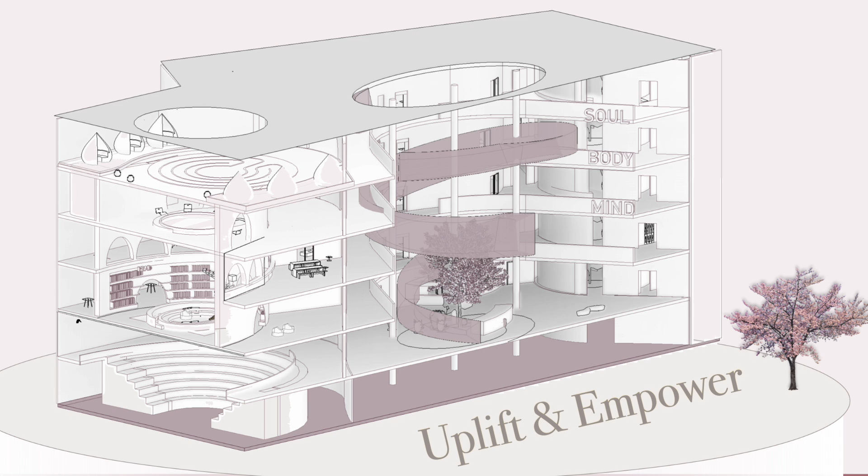The design of the Healing Hub will meet the needs of the primary users by providing a space that promotes a positive healing environment and helps women cope with anxiety and stress. The space will be designed to uplift and empower feelings of joy and happiness.

The Healing Hub will be located in Fordham Heights in the West Bronx in order to reach their key demographic. Fordham population is mostly Hispanic, Latino races, followed by African American, and lastly, Asian population. Many women are immigrants, undocumented, and have a strong mistrust of authority.

They do not trust doctors and fear getting tested in hospitals. Many women in the Bronx live below the poverty line and have little to no education. This has been linked to breast cancer disparities in all areas of care.

There are many complex factors that contribute to breast cancer disparities. The most apparent factors are linked to education, lack of healthcare coverage, and even transportation. Factors affected by social and racial inequalities come to play as well.

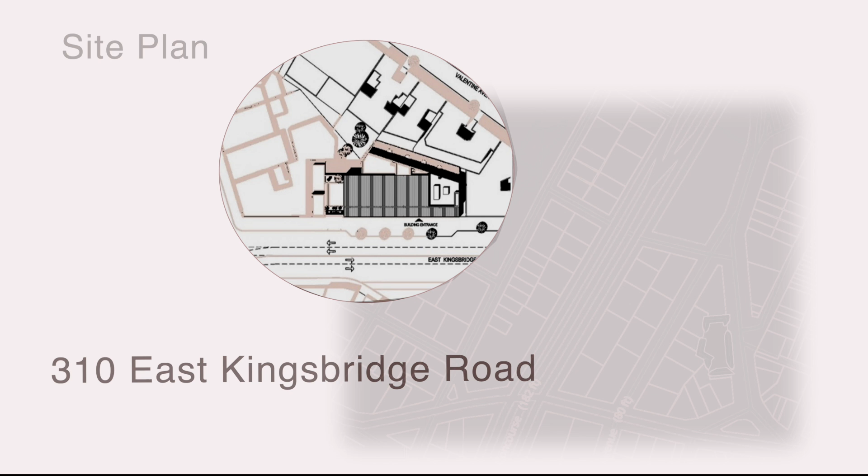The site is located at 310 East Kingsbridge Road. It is centrally located to many different forms of transportation, making it easily accessible. The building is 78,000 square feet and has 5 floors, including a concourse level.

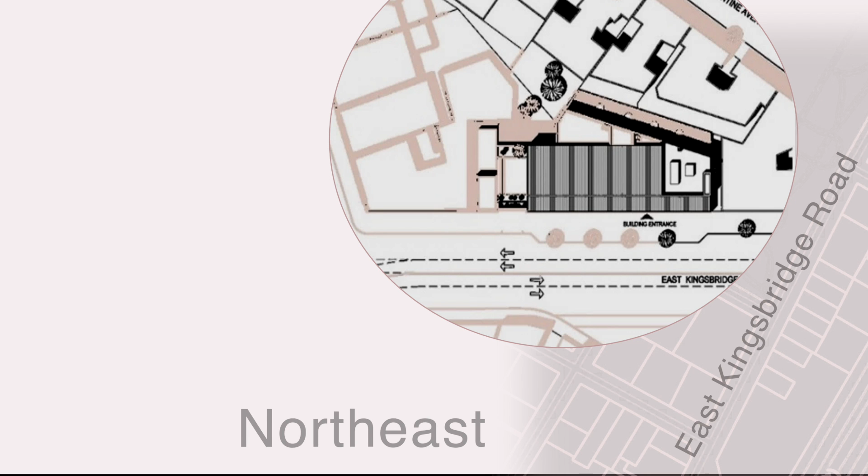The building faces northeast and spans from East Kingsbridge Road between Fordham Road and East 192nd Street. The building has direct access to the sidewalk and multiple entrances. Elevators and a main stair are situated at the back and west side of the building, and offices and support spaces are positioned along the west and north side.

The design concept is inspired by the individuality of each woman. Breast cancer is the most common occurring cancer in women around the world. There are several types of breast cancer, and identifying which form a woman has is essential in tailoring the best treatment for her.

No two breast cancer diagnoses are the same. Each woman has her own story, her own unique cancer, her own set of DNA. The center will celebrate each woman's personal identity and struggle with breast cancer and the ripple effect it has on the woman's life, while promoting female empowerment and individuality.

The stacking diagram will show the floors and how they are organized by function. Each floor has specific activities to limit the amount of traveling the woman must make. The hub will offer a clear and easy wayfinding system.

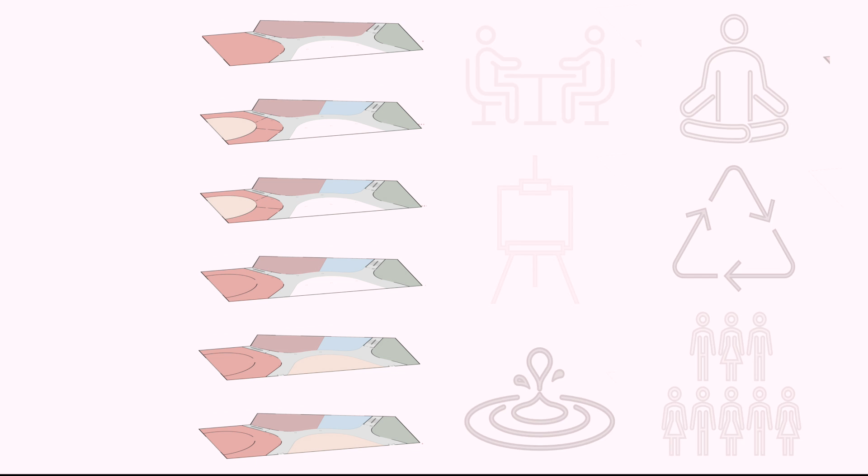The wayfinding design will blend in with the overall design of the space. The design strategy will be to distribute areas of use close together. This strategy will help reduce the distance between places that require users to travel.

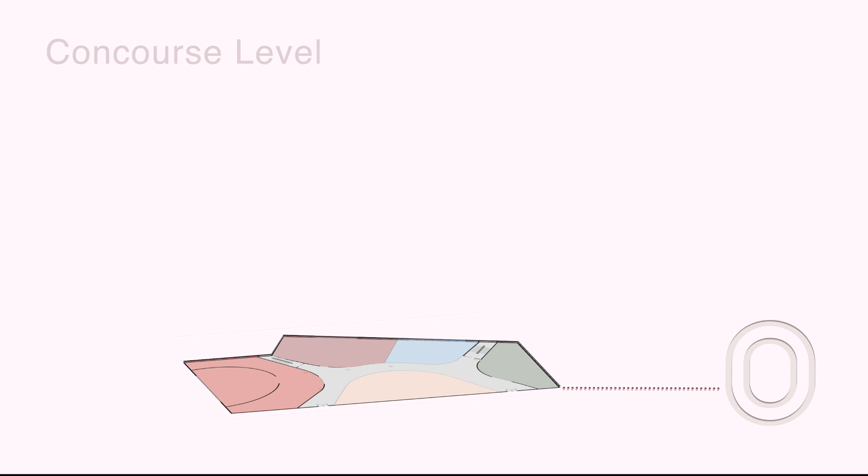Appropriate distances between these places will aid in high levels of comfort, satisfaction, and help to lower levels of stress. The concourse level will have double height auditorium, daycare, conference rooms, and galleries. The first floor is the welcome hub. The activity areas include the open atrium with memorial garden, boutique and salon, as well as auditorium.

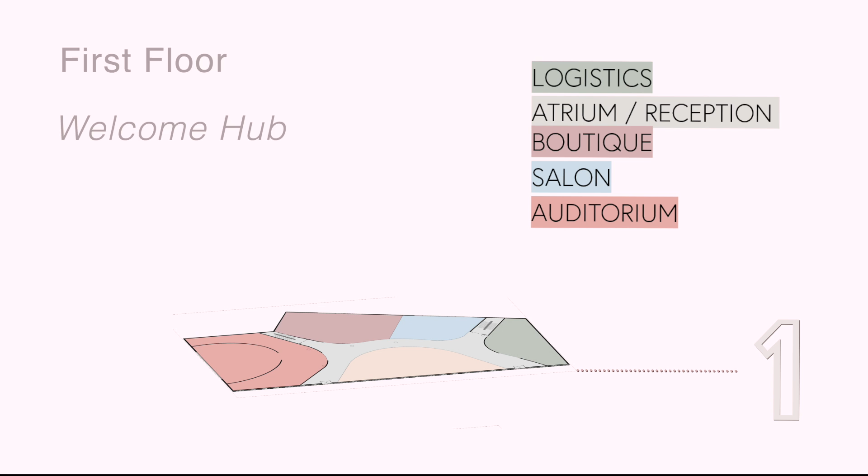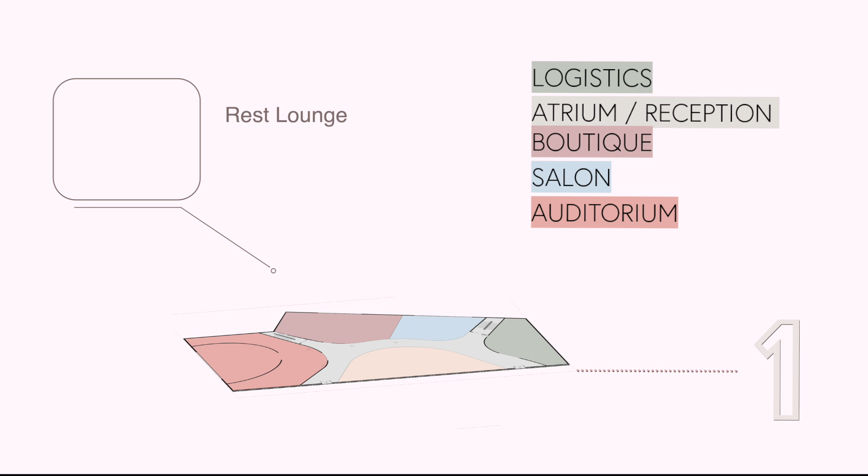On each floor, located next to the elevator, there will be a rest lounge. This is an area for women to sit and gather themselves before or after activities. It also encourages socialization and interaction, which is a big part of the support system that helps cancer patients.

The second floor will be the work hub. This is where all the employees and volunteers will work and meet with members. The third floor will be the learning hub. This will include all the multi-purpose education classrooms, including art therapy, music therapy, and nutrition classrooms, as well as research computer labs and access to the library.

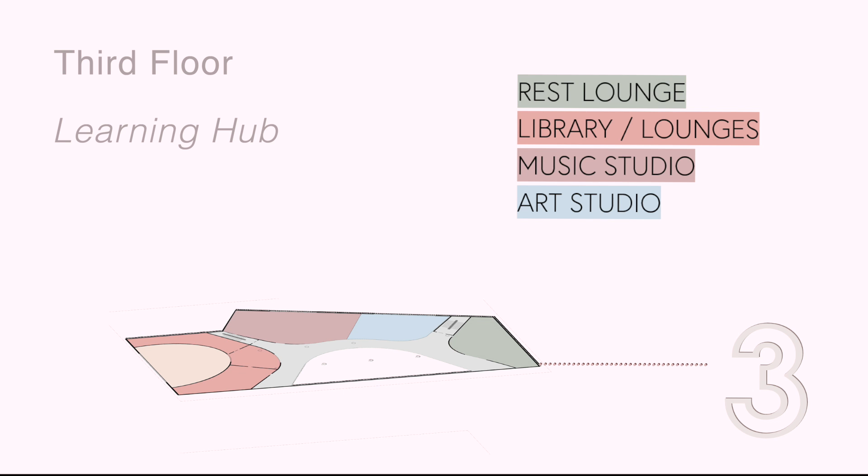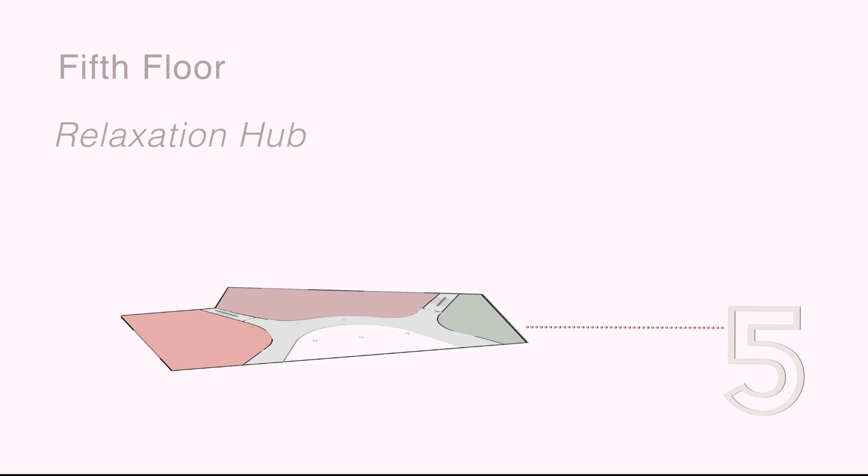The fourth floor will be the wellness hub, which will have activities pertaining to wellness: the spa, meditation spaces, private Reiki, and physical therapy area. The fifth floor is the relaxation hub. This is where all the healing will take place, in the healing garden, the health cafe, and the nutrition center.

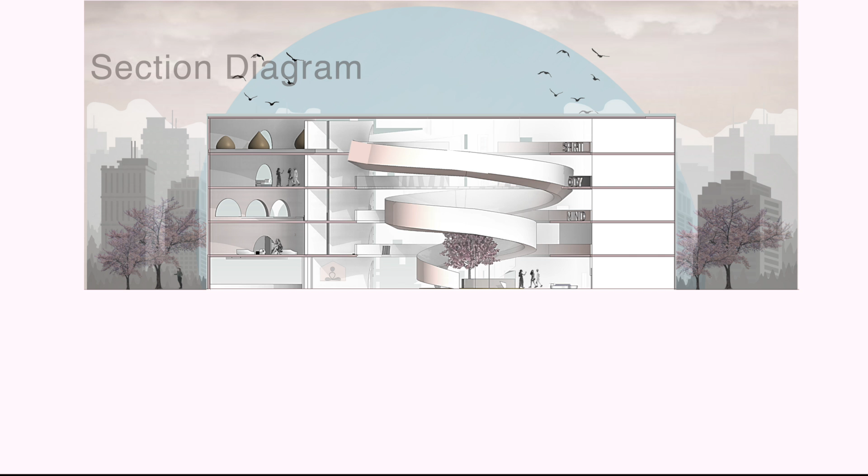The building's facade will be semi-transparent, giving members privacy once inside. The building's exterior will be cladded in wood panels and will provide lots of natural lighting through the large arch windows throughout the building. The section diagram illustrates the visual connection desired between the different functions in the building in order to create a clear overview of the building and the different activities.

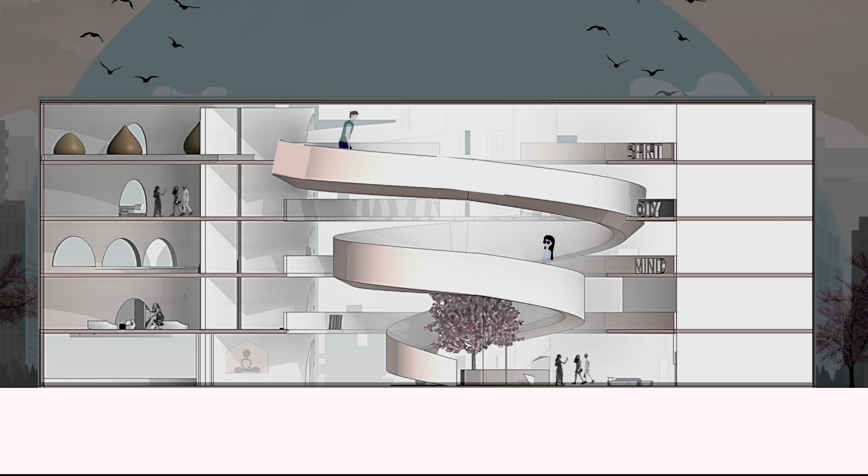It is important that the functions are visible from each other, inspiring the users to participate in social gatherings and create a clear overview of the building's layout. Furthermore, it is important for users to have a clear overview of the different private and social zones in each plan, as their moods might change several times during the day, creating a need for easy access between the different zones.

The concourse level will have multi-purpose classrooms, a daycare center for members to drop off their kids while partaking in classes. In the center, there will be an art gallery space used for displaying members' art, as well as hosting local art shows for the community and engaging the locals.

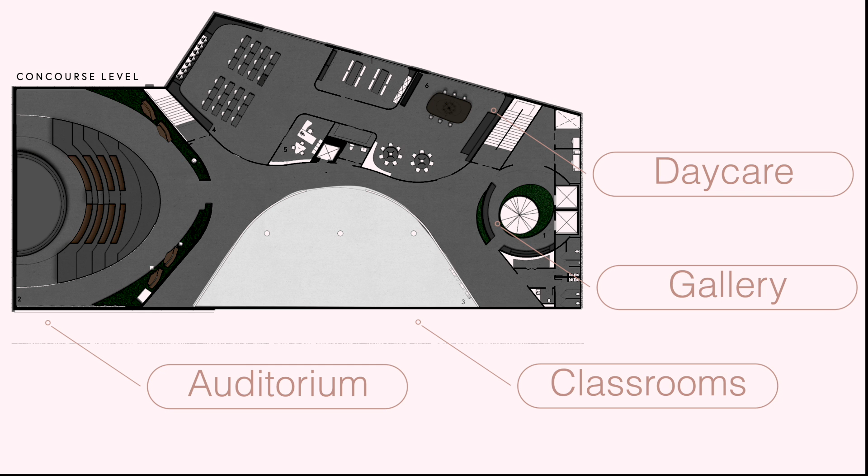The ground floor's main entrance will open up into the atrium. As you enter the building, the first thing visitors will see is the ribbon ramp that will be located in the center. The ramp ensures good internal flow between the floors.

A reception area will provide information regarding services and help members locate activities. There will be seating for members to wait for appointments or meet up with other members. Restrooms and elevators will be located to the right, as well as the center of the floor plan, making it easy for members to get around and not have to travel across the building.

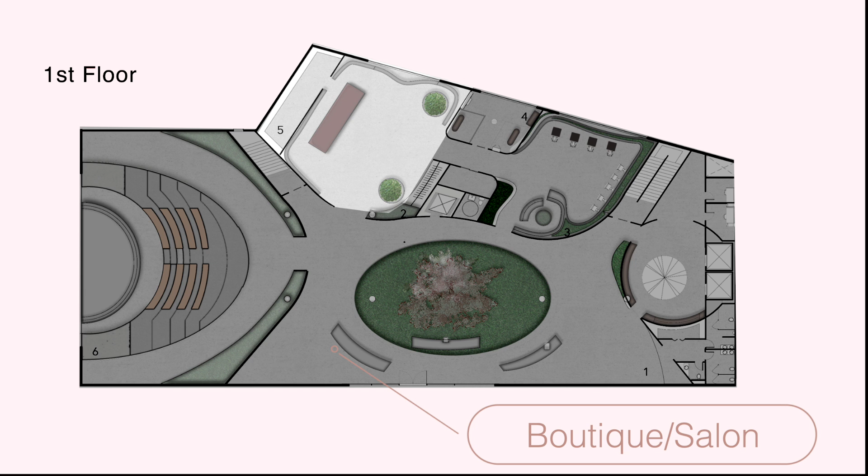The boutique and salon will be located towards the back. Between the spaces will be a dressing room where members can change privately. To the left will be the auditorium. The space will be used to host events and lectures. Wooden panels will span across the space. Concrete circular stairs will provide easy and clear circulation.

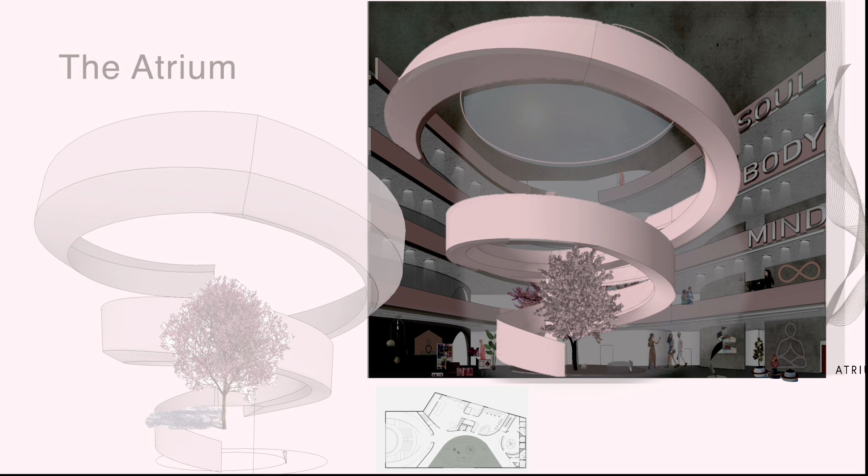The atrium will be the members' first impression of the space. The ribbon ramp is inspired by the design concept of an abstract version of the DNA strand. The ramp will be made out of polished concrete and connect to all floors. The skylight will be located over the spiral, providing a sense of movement and flooding the space with natural lighting.

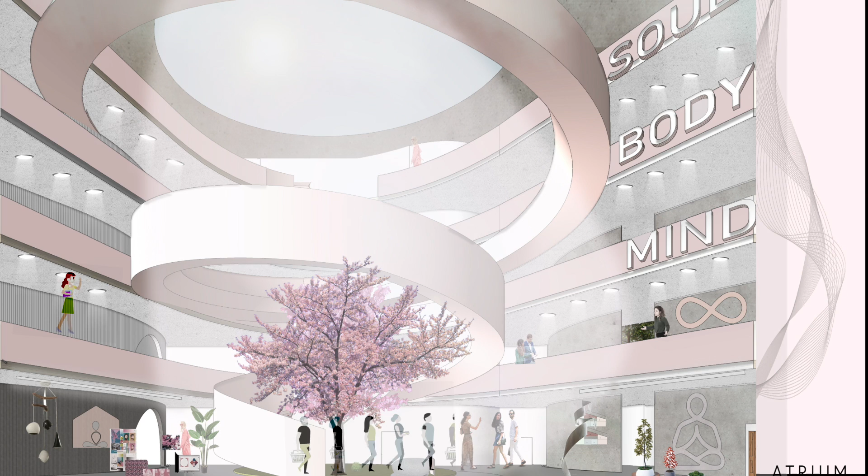The floor plan will be cut to create space in the open common area. The opening of the floors allows vertical views, giving an overview of the activities and the people upstairs or below. There will be a memorial garden with a large tree with names of breast cancer survivors. The recessed linear lighting will illuminate the open atrium and blend in with the seamless design. Cast-in-place concrete floors will be used in all of the public spaces.

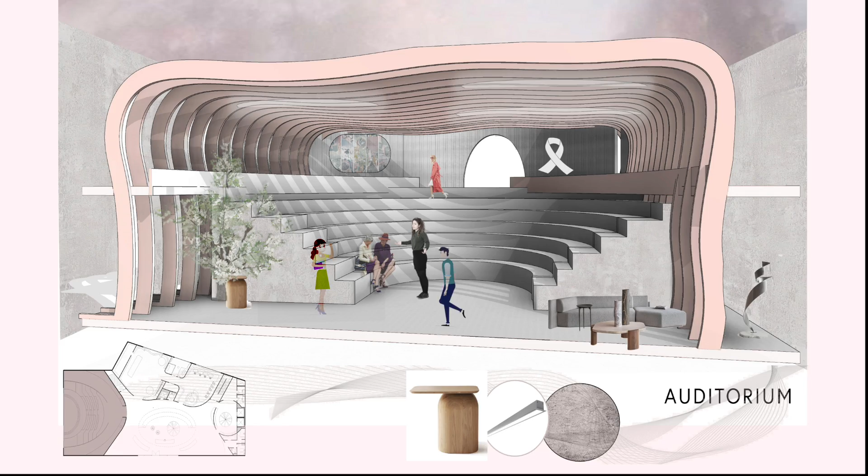The auditorium will be a double-height space. The space will have areas to hang out before and after events. Modular furniture will be used for additional seating for large crowds. Concrete circular stairs will connect the two floors. The space will use acoustical materials in most areas, especially in large open areas.

Unpleasant noise has a negative effect on people and may bring psychological reactions such as irritation, fatigue, and low pain threshold. The hub will implement sound and noise reduction as a design parameter.

The acoustic repeating organic panels will span across the space, providing minimum amounts of echo, and the use of moss walls and plants will further control the noise levels.

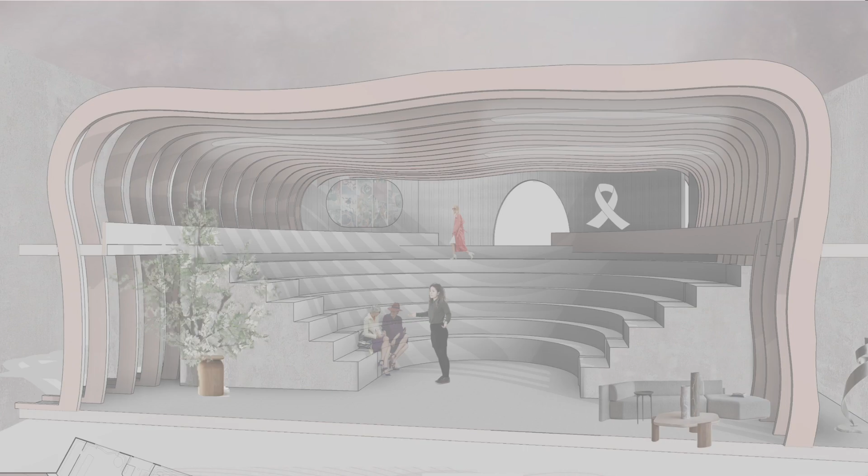The boutique will have many different beauty products and apparel. All of the proceeds will go to charity.

The organic pink ceiling panels mimic the waves of the ocean, providing an instant soothing effect. The uniform pale pink color will provide a balance against all of the vibrant products. The recessed linear lights will be placed between the ceiling panels.

Since color is a very powerful device in the built environment, the hub will incorporate many different color schemes depending on the function of the space. However, to keep the design cohesive, the color will be in tones, tints, and shades of warm and cool colors.

The warm color hues are associated with extroverted responses to social contact. A quiet relaxing, contemplative atmosphere is created by cool hues. The hub will use intense colors only for accents and for contrast to improve visual organization, such as brightly colored grab bars, door frames, and levers.

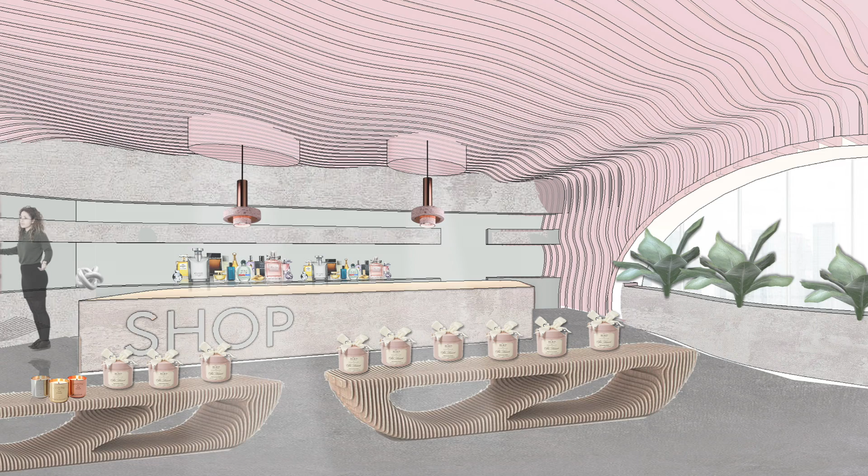The second floor will have an open co-working space with workstations used by staff members and volunteers. Many of the staff members are part-time, so there will be an open co-working space with multiple workstations.

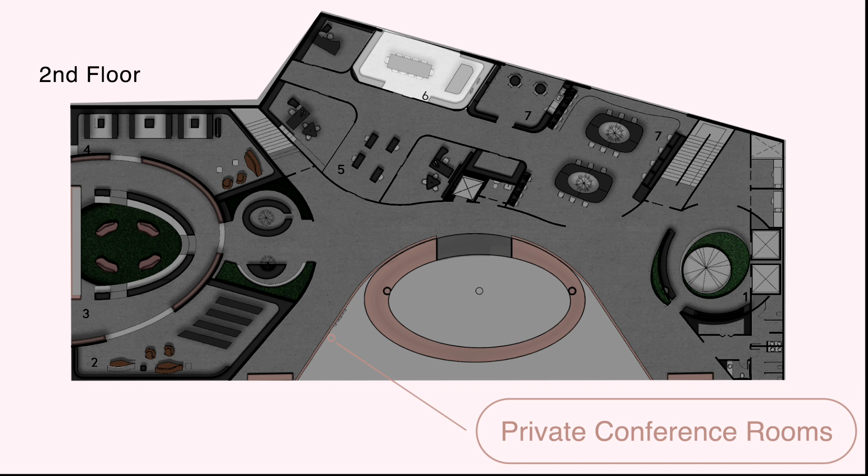All furniture will be ergonomic. Modular furniture will allow for different functions needed in the space. Private conference rooms and executive offices will have acoustical ceiling panels, carpet flooring, and soundproof glass. This will ensure complete privacy.

The library will have areas for members to socialize in groups or individually. Seating will be in the center with wrapped around bookcases that will cut into the floor. Lounge spaces will have movable screens for privacy and secluded areas for counseling.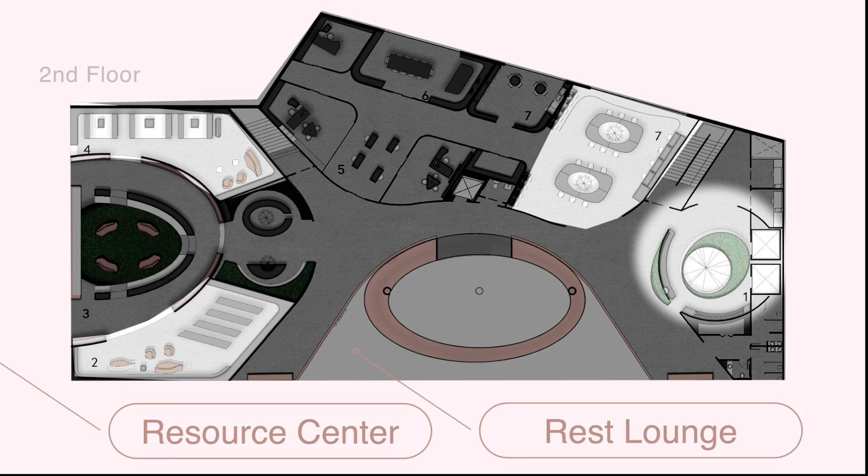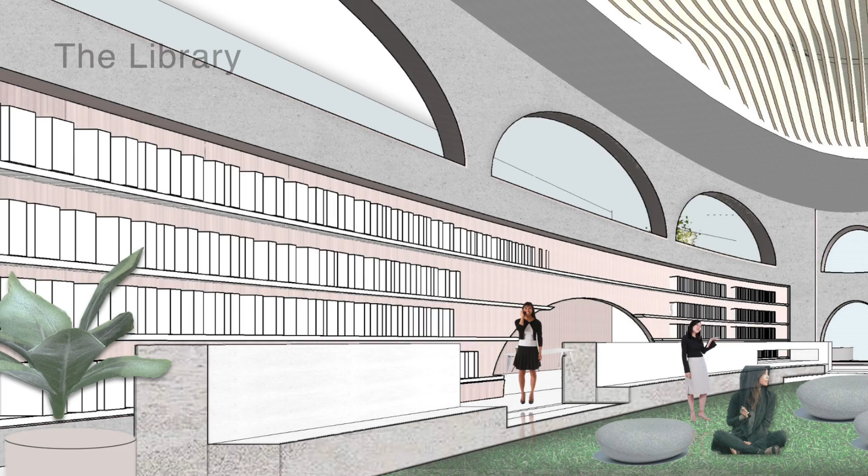The library and lounge space is where members will spend most of their time, as they function as a natural gathering point before or after physical activities, lessons, counseling, and therapy. Furthermore, the activities implemented in this area encourage interaction and conversation and will provide the possibility for informal conversations in smaller groups or for individual reflection and rest.

The use of casual arrangements with movable furniture, rugs, and plush lounge seating will create an overall homey atmosphere and will foster social interaction in a positive manner.

The library and support space area are left open to encourage a visual and audio connection. There's a staircase allowing for easy yet active transition between the two floors. The open nature of the space is designed to encourage use of multiple programs while visiting the hub.

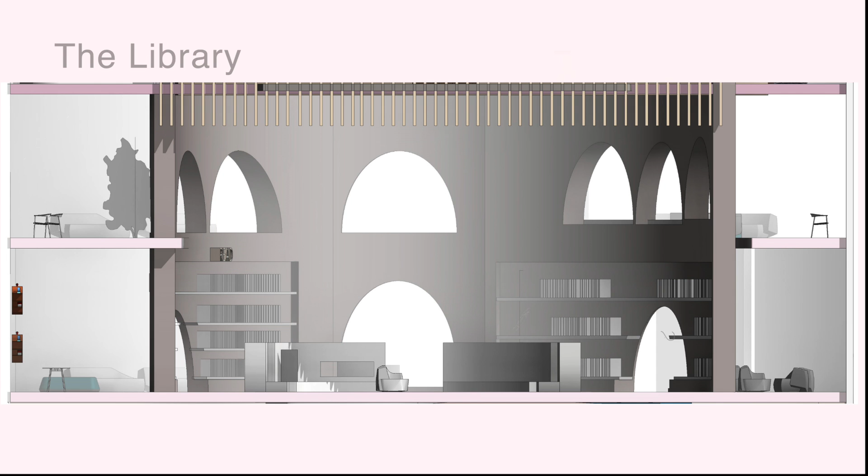The third floor will have multi-purpose classrooms and therapy spaces. The music studio and art studio spaces will have movable walls as well as flexible furniture that can be repositioned for maximum flexibility. The music studio will have acoustical ceiling panels and sound-absorbing floors.

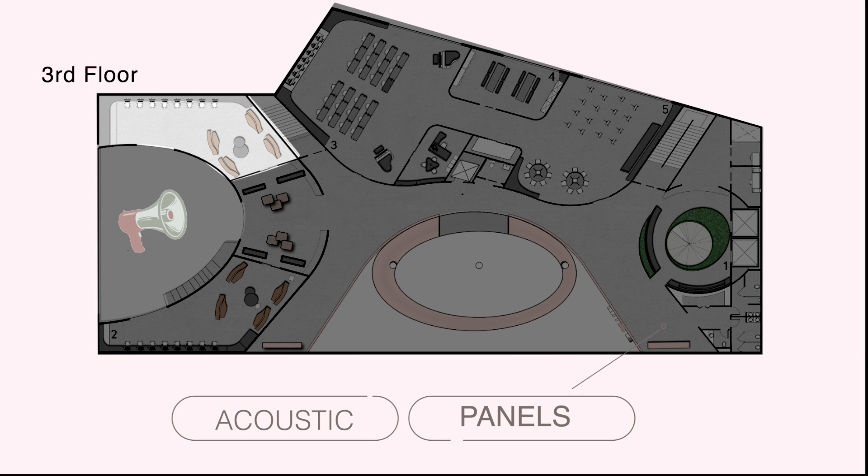All spaces will have controllable lighting and temperature to accommodate different needs and ensure comfort. Support groups and computer labs will overlook the library. There will be a staircase that connects the two floors.

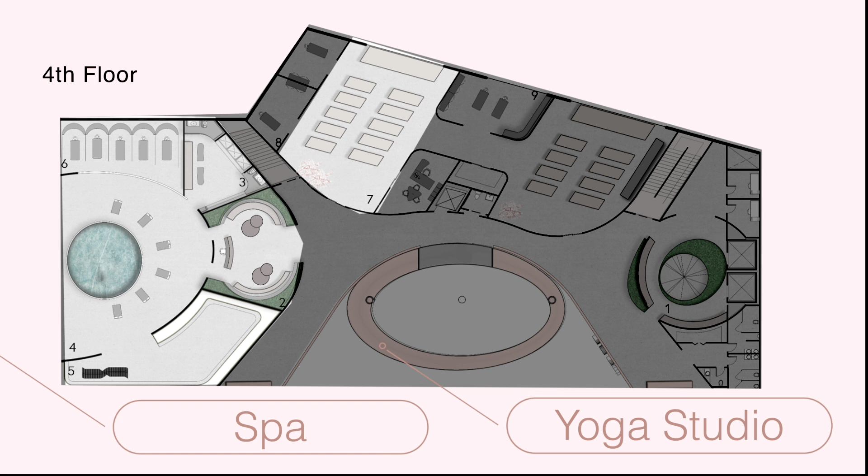The fourth floor will have a spa as well as a meditation and yoga studio. The spa will have its own secluded area. This space will include reception area, locker rooms, treatment rooms, and sauna.

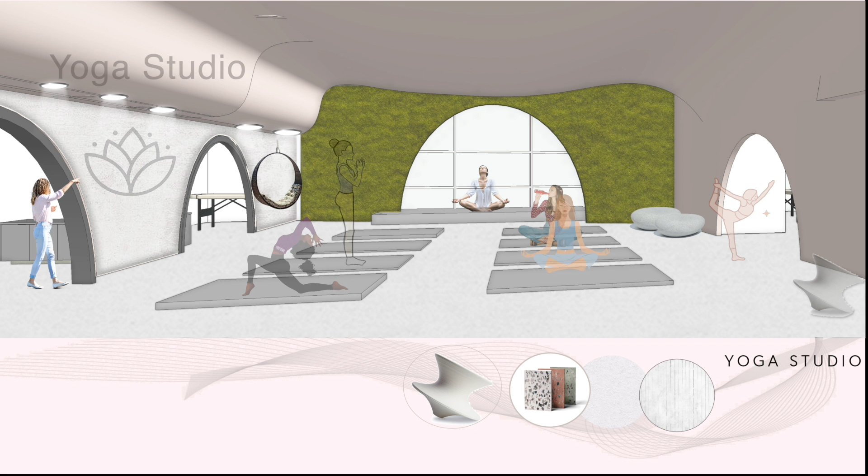The meditation and yoga studios will accommodate many different size classes. There will also be areas for members to work out with trainers on their own. The space will be designed to create a welcoming and calming environment in order to avoid sensory overload. The yoga studios are designed to be adaptable spaces and to serve as a platform for multiple classes and therapies.

Individual therapy spaces will allow members to meet one-on-one with trainers. Private rooms will have acoustic ceiling panels, soundproof partitions, and soft flooring to provide the most comfort.

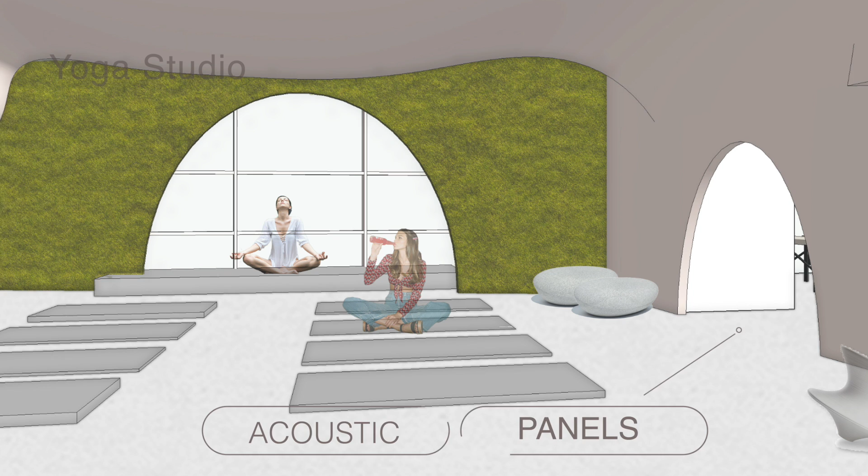The aesthetic of the space is based upon neutral colors and natural materials, allowing for the space to be welcoming for all ages. Large arch windows throughout the building allow for an ample amount of natural sunlight to enter the space. In order to help with heat control and absorb sound, felt window shades and movable wall partitions are available along the windows.

A host of sustainable design strategies will enhance the hub's operations and contribute to the health and comfort of its users. Some design strategies include solar water heaters, a cooling water tower, retention tanks, insulated building envelope panels, low emissive windows, and heat recovery system.

These allow for comfortable air and water temperatures while minimizing the consumption of non-renewable resources. Automated light controls, low flow plumbing fixtures, and high efficiency mechanical equipment further reduce the environmental impact of the hub.

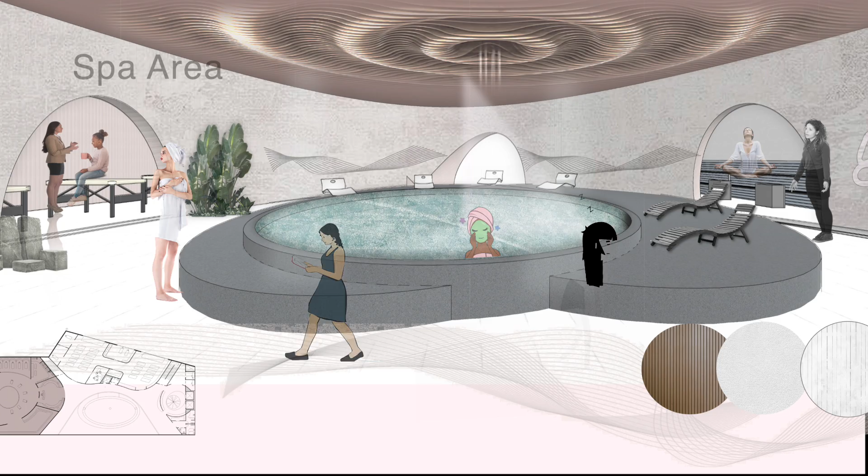The spa area will provide substantial restoration from stress and reduce anxiety. Members are greeted at a softly lit reception area. Glowing glass panels conceal the rooms, blurring the figures of staff and members behind.

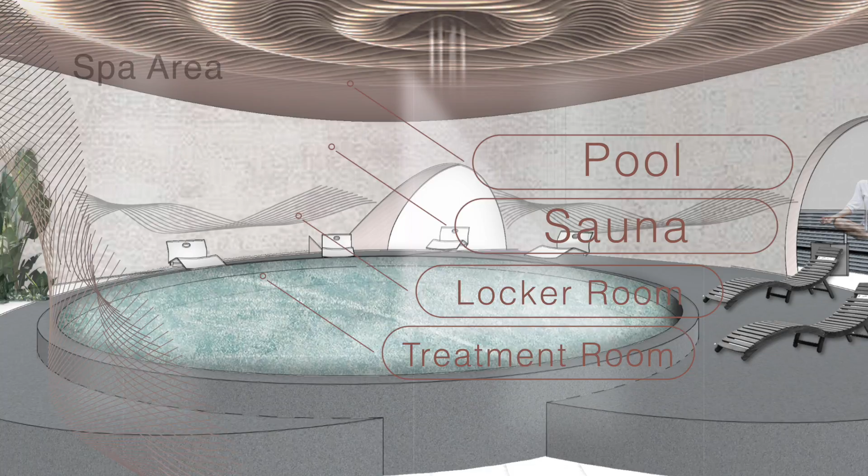The plan is arranged around a central space, creating a continuous flow. Spaces will include a featured saline pool, a large sauna offering salt therapy, multi-sensory showers, a locker room, and treatment rooms. Biophilic design will play an important role, incorporating natural elements from local scenery, geography features, and panoramic vistas to help members feel more comfortable, function better, and promote well-being.

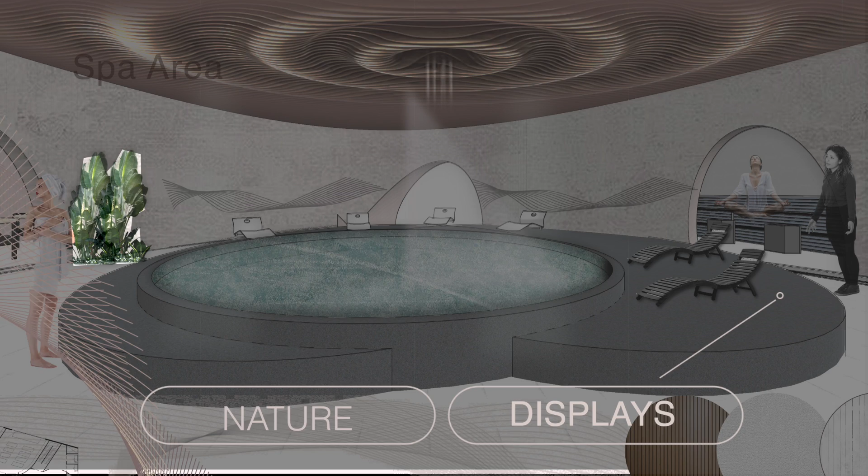Throughout the space, there will be plants and indoor vertical gardens, as well as visuals of nature displayed graphically throughout. The overall design will provide an atmosphere of peace and tranquility, since members are coming to the building as a place to heal and for some much-needed relaxation.

The floors are covered with muted carpeting that matches the tone of the woodwork, while the areas surrounding are filled with gravel, stepping stones, and pot plants. Windows are covered with translucent screens to soften daylight streaming through. Minimalistic lanterns emit warm glows throughout the rooms.

Colors were chosen to evoke a calm and relaxing environment. Members can feel a sense of stability among their lives.

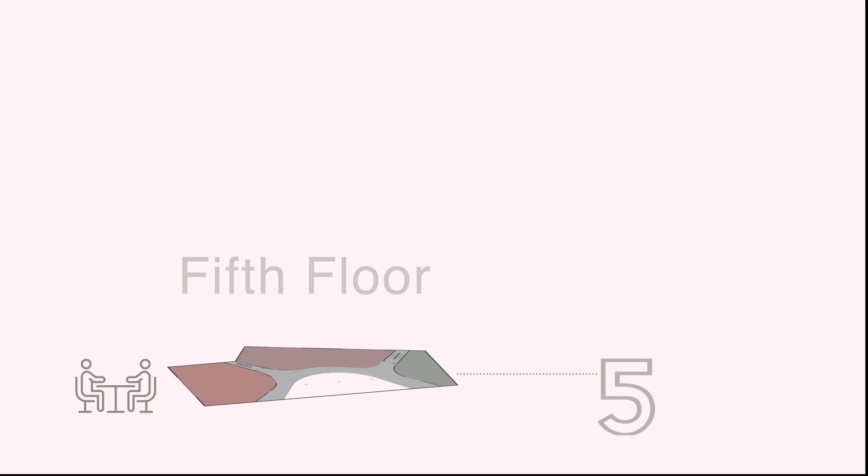The 5th floor will have a healing garden, health cafe, and nutrition lab. This is where a bulk of mingling and self-reflection will take place. The health cafe will be used by members as well as staff to enjoy a healthy meal. All things served will be approved by the nutritionist.

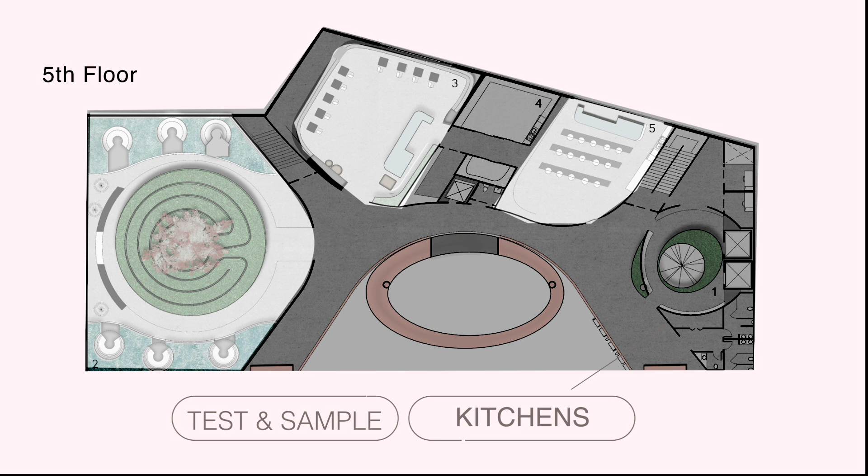Booth seating will line the walls, covered with soft fabric for maximum comfort. The health lab will be next to it and used for nutrition counseling and cooking classes. There will be a test kitchen for members to learn how to cook healthy meals, and a sample kitchen for food prep. The kitchen will be located between the cafe and health lab to make it easily accessible from both areas.

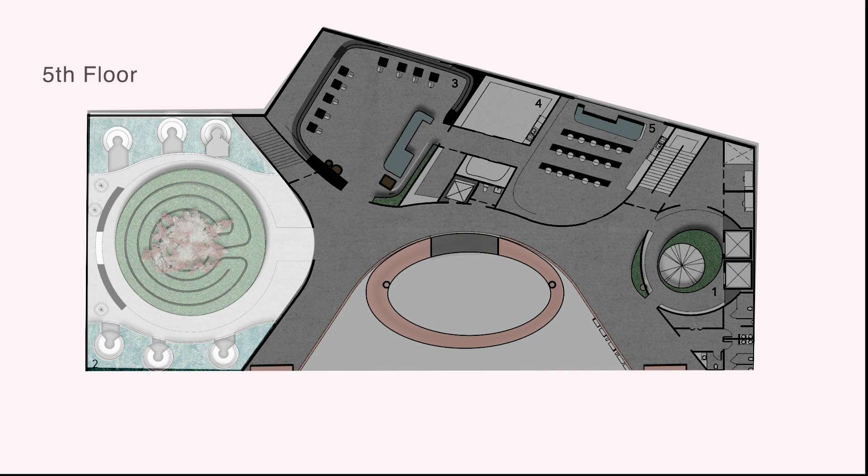The healing garden will take up most of the 5th floor, featuring a labyrinth maze in the center, with floating pods placed along a shallow pond. The pods will be used for self-reflection, and the healing garden will be used for self-meditation and self-reflection. The health cafe will offer a nutrition-approved menu.

The organic wooden panels improve the atmosphere by implementing a more fluid and spacious design. The spacing of the panels allows light, sound, and air to smoothly pass, reinforcing the concept of flexibility. Seating will be built into the organic curves.

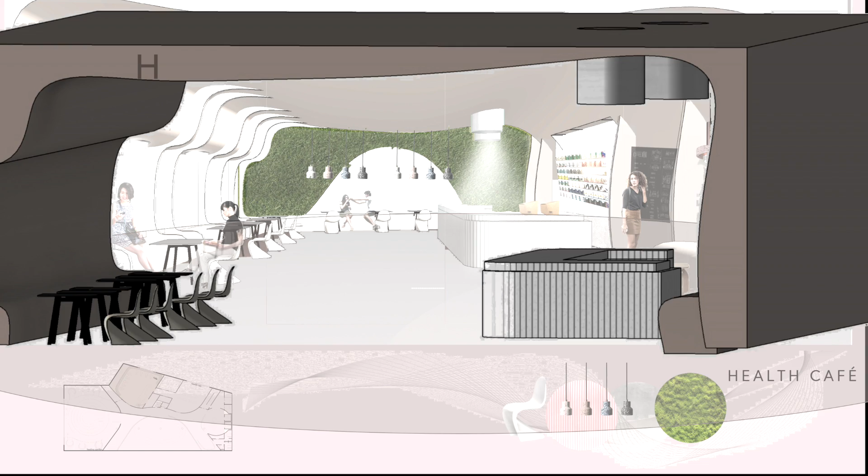The vertical gardens will create a pleasant environment, bringing nature indoors and helping create a tranquil environment that invites members to relax, take their time, and eat in comfort. Natural wood was used for the coffee bar, walls, and furniture to add warmth. The combination of different materials creates a dynamic and exciting space.

Well-designed gardens imply peace and encourage social interaction. The healing garden will improve members and staff by providing a space for relaxation and emotional restoration. The space will incorporate elements of water, green foliage, grassy spaces, and trees, along with practical things such as benches and tables. Fountains provide a soothing and meditative feel, and the labyrinth offers members a chance to reflect.

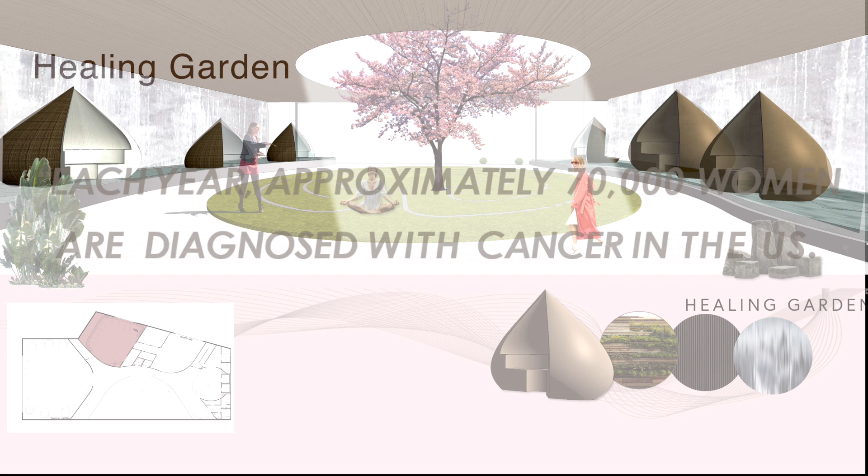The garden will have a shallow pond on both sides. The pond will send out a ripple, indicating the shocking statistics of how many women are diagnosed every 2 minutes. The healing pods will float on the pond and are used for individual reflection. These pods are acoustical and can be closed for privacy.

The open skylight will fill this space with fresh air and tons of light, providing a positive atmosphere. Daylight is very important in a healing environment. Well-lit spaces play an important role in well-being and increased satisfaction.

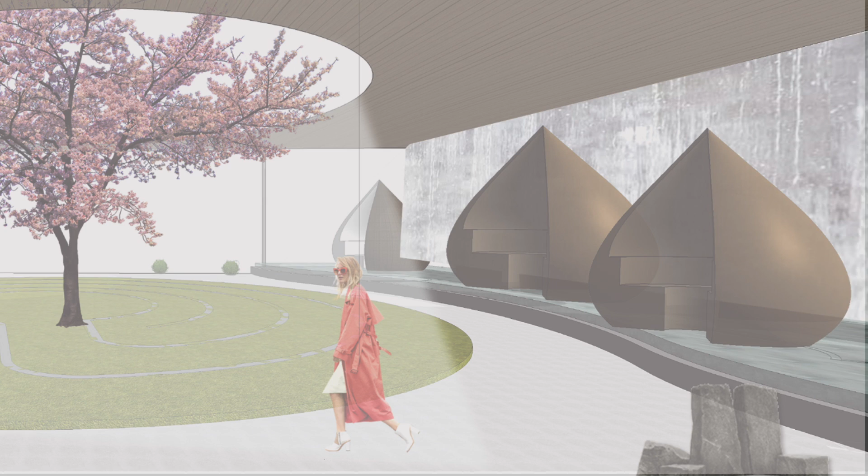The hub will incorporate areas that will be brightly illuminated, supporting the therapeutic and healing effects of light in relation to easing depression and sustaining a circadian rhythm. The space will provide natural light with the use of light wells and skylights in areas that aren't adjacent to the exterior wall. The healing garden will create a tranquil space of refuge where one's senses are completely immersed in nature.

The ultimate purpose of the Healing Hub will be to help women before, during, and after breast cancer, as well as provide enhanced awareness. The Hub will design spaces that empower and inspire healing.